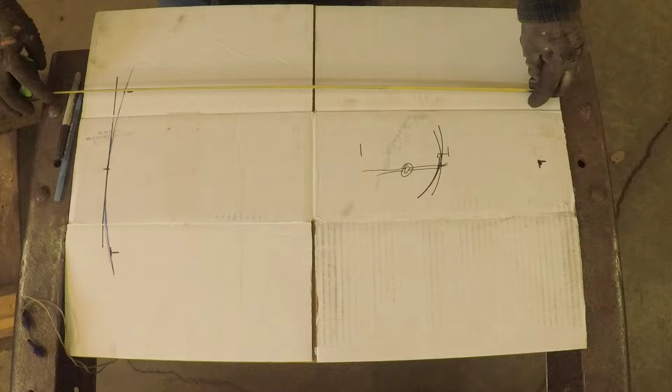for a 24-inch mark there, and a 24-inch mark, sorry, no, stayed here. Need to start over, I screwed up.

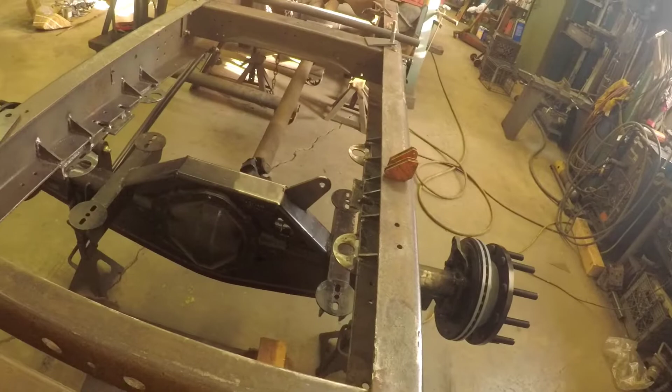Hey guys, so in the garage today trying to finish up this mess. Still got several things to tidy up on the airbag mounts, just some finish welding, but for the most part it's pretty well done.

Airbag mount, bump stop, and the next thing, you see I've got one bracket mounted right here. The next thing is we've got 4 links, but we do not have a panhard bar. So let me show you what we have to work with.

So I've got a few pieces laid out on the truck here, and I'll show you what I got. I got this with the 4-link kit. I ordered this along with the kit because I knew I would need one, and they have a nice one that comes with it.

It's from Infamous Metals, and they sent me 2 of these brackets that I'm going to mount to the frame, and this is your panhard bar here, and it's got your opening for your bushing, and then the other end of it is just hollow. They sent it like this because you have to cut it for your own setup. They really can't tell any of that ahead of time, and you really don't know what to measure until you start getting your axle underneath it.

And here's your bushing, and they send this right here with it, and I'm going to have to cut this for length. Your metal piece that goes in your bushing, your bolt rides in, so I'm going to have to cut that for length to fit in between my brackets.

And then the other end of it, they send this high angle heim joint with these nice fittings that go into it that create a certain space, and this makes the bar adjustable right here. They send you 2 of these, one of which is already tacked to the axle housing there, just for a moment to give me an idea to measure off of.

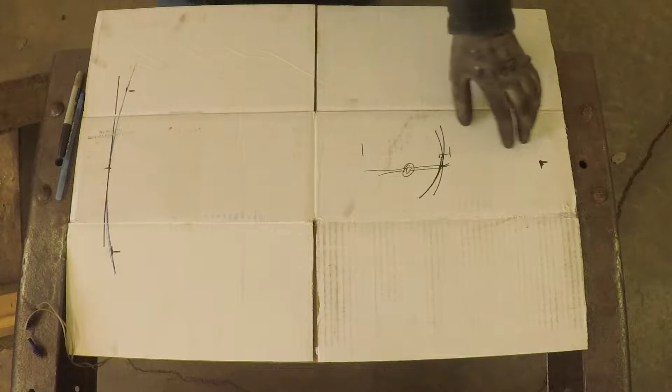But I made a mark over here on this end, so right there being the beginning of the tape measure, and I came over about 24 inches because measuring inside the truck frame, my track bar is going to end up being somewhere around 24 to 25 inches. Longer the better, so I went back with the shorter measurement of 24 inches and made me a mark over here, and that cross right there is the center point.

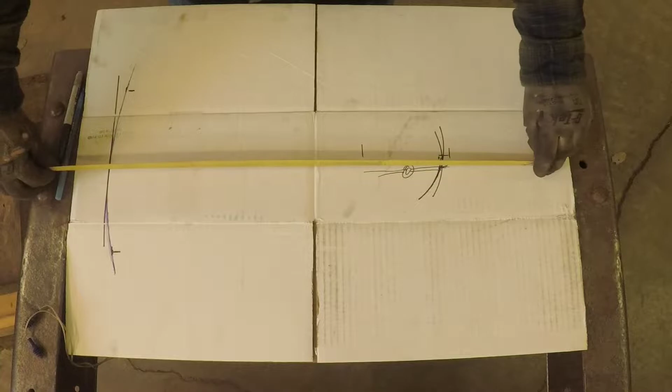And then I rotate from my center point over here to over here and made a 24-inch mark, and then done the same thing this way and made a 24-inch mark.

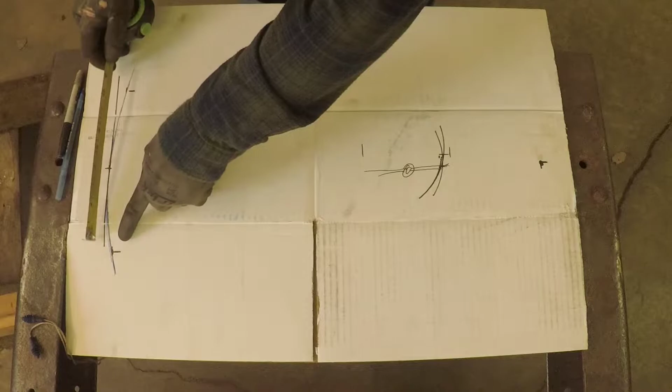So I know my travel is going to be about 9 inches of travel with the airbags. Full compression 3 inches, full travel 12 inches, so that gives me 9 inches. I go 4.5 inches from this mark to here, and 4.5 inches from this mark to here.

And so that gives me this range right here is the full travel of my airbags. Normally, they might stretch a bit under an articulation or something here. They can't really compress much more than this point, but this should be the travel area.

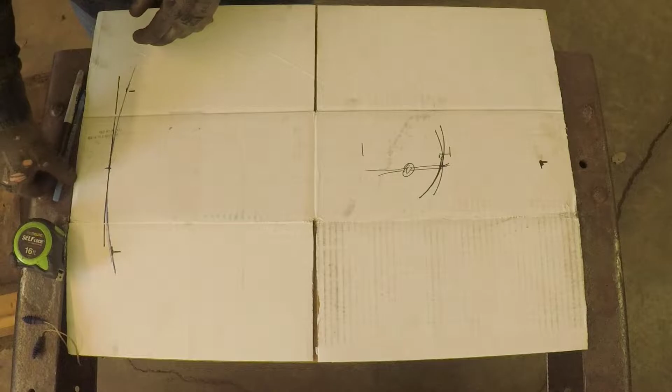So you can laugh at me if you want to on the next part here, but I'm looking around the garage for something to use to lay this out, and I found an old pair of earplugs.

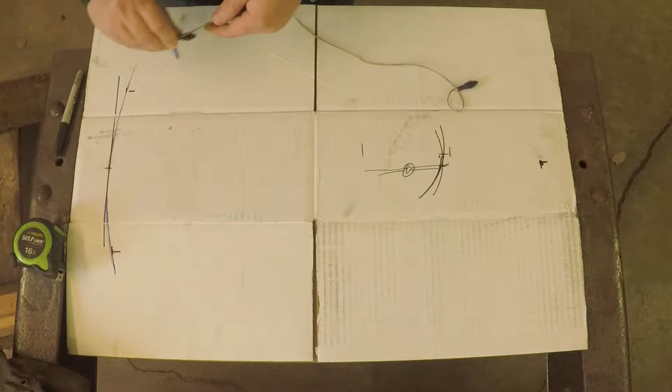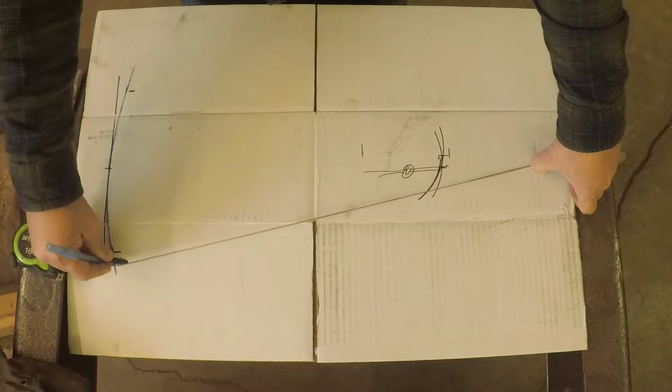And so now that I've got my marks, I'm going to take my ink pen and make a couple wraps around the base of it here. I'm going to set it here on my mark, come back over here on this other side, and use my fingernail to kind of hold it right where that X meets. I'm going to make sure my pen's straight up and down, and I'm going to do this to simulate the panhard bar over the length of travel and make sure it lines up where my marks are.

So the next portion is over here, where you go from a straight line off my measurement off this end, and it looks like I'm going to have about a half inch of full travel one way or the other on this axle. So when the axle is underneath the frame, it's going to shift as it goes full compression, shift 3/8 to this side, come back to center when the bar is level, and then as the bar goes down, it'll shift back 3/8 to this side, or a half inch to this side again, 3/8 to a half inch, something like that. So that gives me an idea of what kind of axle movement I'm going to have under the frame if set up at that length, and that should be a good movement for full travel.

Obviously you want it to stay center all the time. That's not exactly feasible unless I was maybe doing a triangulated 4-link. Maybe I should have gone that route, but for the type of suspension this truck's going to need for going down the road and stuff, this will be great.

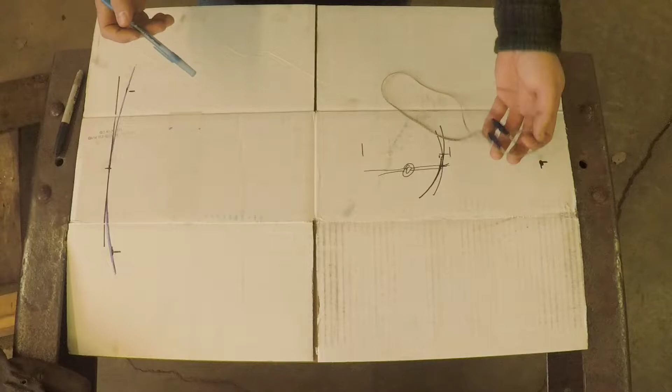And that is how I used an old pair of earplugs, an ink pen, a Sharpie, and a piece of cardboard to kind of lay out and make sure what kind of travel I was looking at.

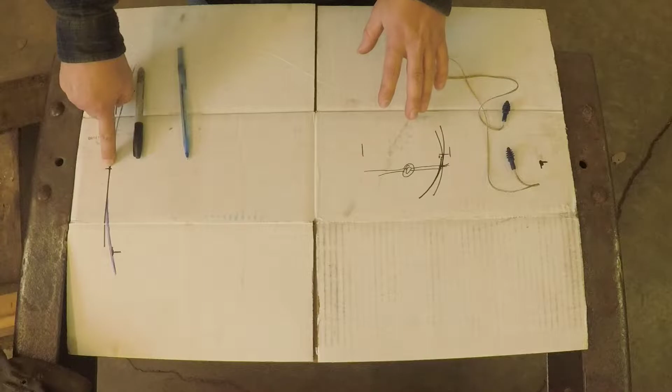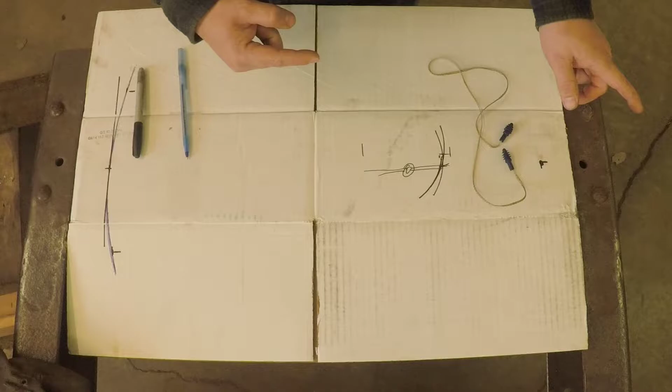Knowing that I'm looking at a half inch to 3/8 of travel, what I'm probably going to do is when I set this at the full level, I'm going to set the axle an 1/8 inch out the frame that way. That way, when it does travel that full range of motion, it goes an 1/8 inch out the frame that side, and 3/8 to 1/4 out the frame that side, and that gives me a large window of acceptable center for ride height, because I don't know that I'll be riding directly right at level with the panhard bar.

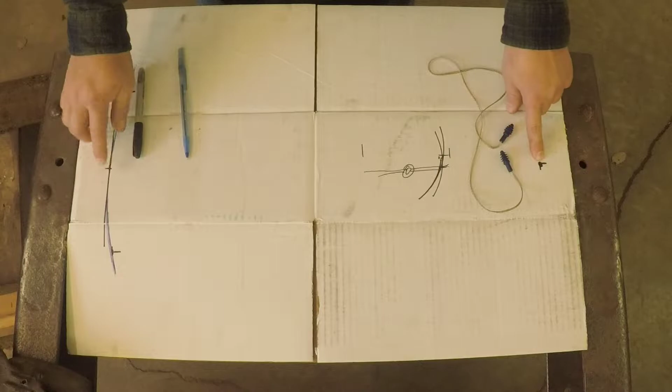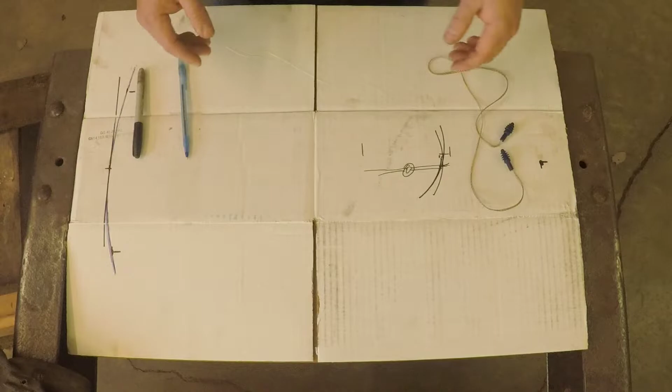And if it turns out that that is where I want to be, I can always, with the adjustable panhard bar, move it a good 1/8 inch to 1/4 one way or the other to put it where I like it. And if my ride height, I feel like it needs to be exactly center, I can. But that's why I have an adjustable panhard bar, because I've never done this before and this is a full learning experience. So this is how I laid it out, and now I'll go on to mounting my brackets and laying it out on the frame and cutting for length.

Let's talk about custom parts here for a second. So you're going to buy a kit and it's going to come with exactly everything you need. All you got to do is weld your tab on here or bolt this on here, and everything's going to go exactly how it should be. If you've got out of the box type stuff, like a lot of parts for my Jeep Cherokee, you can buy all kinds of stuff for it, but sometimes they need to be modified a little bit, and it goes no different than anything you go to do. So I'll show you what I'm talking about here.

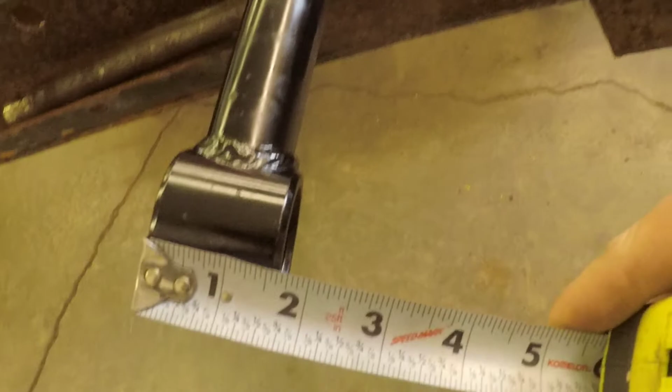So this right here is my end for my panhard bar, and let me grab a tape measure here. I had one on my hip a second ago, and there we go. So it is looking at 1 5/8 inches wide there.

So over here on the vise, I've got one of my bushings. It comes with 2 bushings, and it comes with a sleeve and a bolt with the brackets that I showed you. The sleeves, everything fits in the bar like it should. The bushings here, but the problem is you still have got tape on this one.

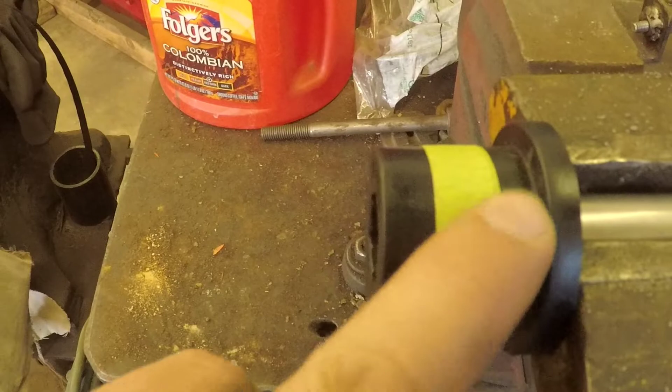I've already cut this one down to length, and I've actually cut them a bit long, because if you look at it measurement wise, that is about 1 3/8 inches to that shoulder. So being 1 3/8 inches, 1 3/8 inches, that's 2 6/8, that's 3/4. So 2 3/4 inches. Well, my bar end's only 1 5/8 inches wide.

So if I want to use both these bushings, I don't want the bar to move back and forth to the bushings. I want the shoulder to stop it. So in order to do this, I need to cut both of these bushings down some to where they press in on each side of that bar, and this shoulder right here is actually making contact with the outside of the bar end.

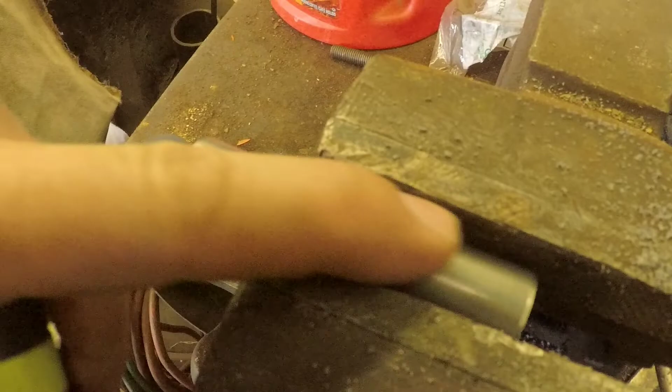The next thing is I'm actually gonna have to cut this pin. This is your sleeve that I've got clamped into the vise with. This sleeve goes inside your bushings, and this right here is also too long, and this will have to be cut down, and I have to get a shorter bolt for that setup. I'll show you more about why that's that way here in a little bit.

Just note that sometimes you have to cut and custom your pieces to get what you need. They probably could have done some of this there at their shop, but they'd have had to charge for their time, and the kit may not cost as much. And if you're doing all this anyways, you don't mind custom fitting a few pieces, at least I don't.

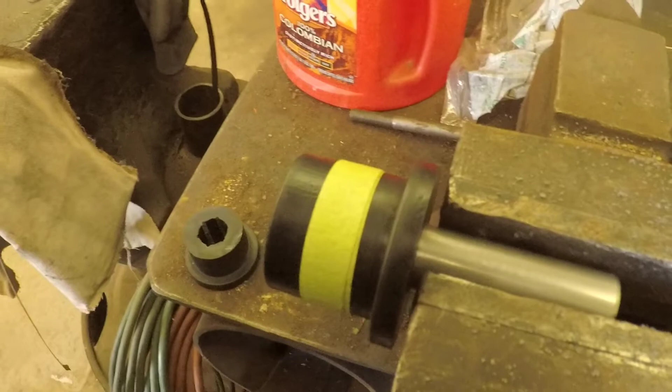Buying a custom kit doesn't fully mean everything's going to go on like it should. You gotta take measurements and pay attention to what you're working with.

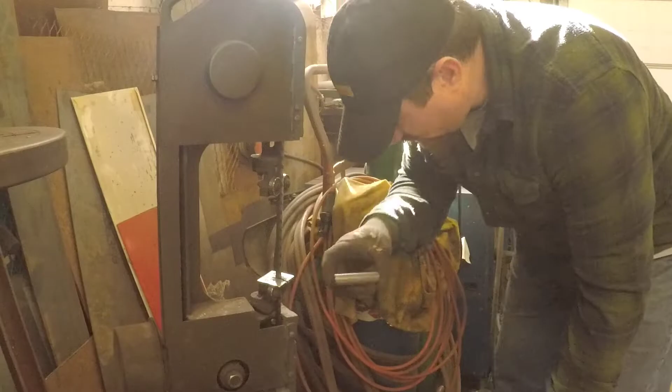I've got my pin here, and I've got it marked at 2 1/8 -- well, actually it's a little bit more than 2 1/8. I'm gonna cut a little bit longer, and then I can slowly trim it if I need to, which I probably will need to trim it like a 1/16, but we'll see. Plus, if for some reason I don't cut it exactly flush, it gives me a little bit extra meat to kind of clean it up with a flapper wheel or something.

And this is our bandsaw -- you can buy one of these at Harbor Freight or something. We lay it down and it drops on its own, spring tension in order to cut. We use it like this a lot.

Okay, now I've got a little burr there, and I'll take that off and kind of clean this up all the way around. But now I've got it cut to length. Manufacturer's probably going to tell you not to use it this way, but we don't have a stand-up bandsaw, so this one works.

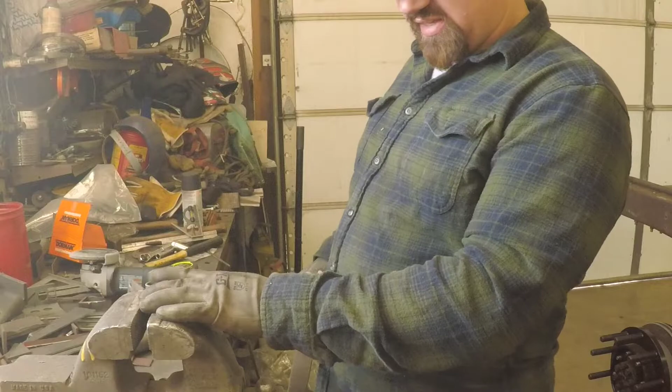So I've got it deburred some, and it's not exactly level. I can kind of take a flapper wheel to it and eyeball it. But what I'm going to do is I've got it in the vise here, pretty well level. If I really want to be super picky about it, I can kind of tap it a little bit. Lay my rule up there -- yep, now we are level.

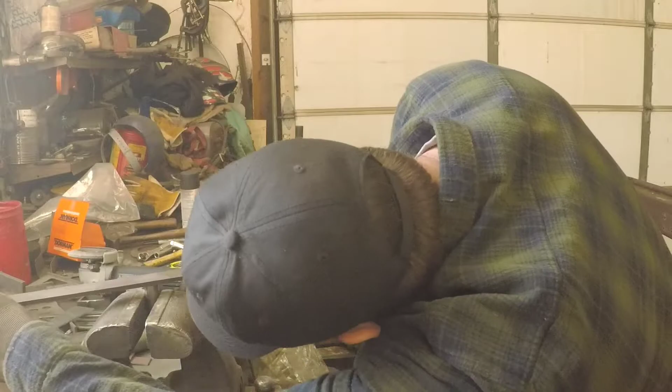So I'll give it a little extra there, just to make sure. I've got a great big flat file here, and I'm gonna put it on there about as level as I can, and level it just a little bit at a time. I've only got one of these, and I can't mess up at this point. If I do, I'm done for the day until I get another one. So I'm going to try and take care of the bump -- I'll go to that side and kind of work it some.

But get that filed where it is nice and square. I'm pretty close. And then you can kind of see where the file is cutting on it. You can tell where it's shining, where it hasn't been hit yet. So I know about how far I need to go down. Kind of get it all where it's flush. And then once I'm there, and I'm pretty close right now, I'm gonna call that good.

I'm gonna go around the edge here, just add a chamfer. It doesn't take a lot, I'm just trying to knock the burrs off of it, all I'm trying to do, if there is any. Like that. So now that pin should be the right length to go through my 2 bushings, and then we can get a bolt and mock this up.

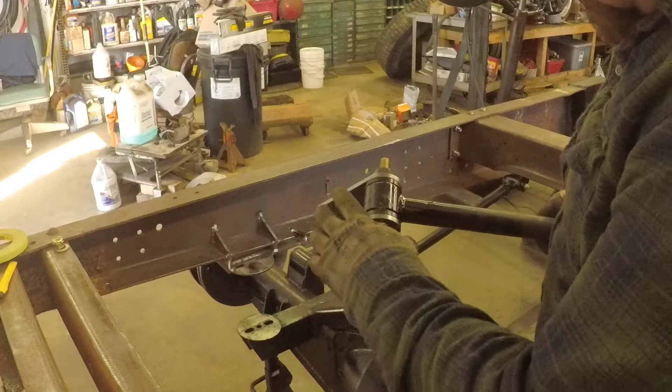Okay, so what I've done here is I did have to put that little metal sleeve back in the vise, level it back up, take a little bit more off of it to get this good and tight. And I can still see a slight bit of daylight in this one here, but I think that's good. I don't know, I might decide to shorten it just a little bit more, but we'll see.

Because of the bolt, we had a shorter bolt and shorter shank, and I want the shank to ride inside of these mounts here and throughout the sleeve, and we couldn't find one that was just right, so I used the one that was sent with it, and I've put 2 washers on this side and a washer on this side. And note that this is not the nylon lock nut that came with it, because I'm threading this on and off by hand right now, getting it mocked up. When I go to install it, I will install the correct nut and tighten it down.

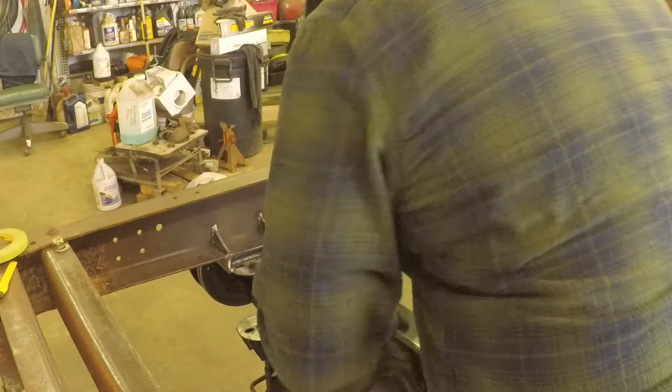So there are a couple things we need to do here. This is just kind of initial mock-up. I'm gonna set it right like that. So one is this obviously has to be shorter to fit in the frame. And the next thing is, let me come around on this side. I really would like for this to be as far back in the frame as I can without this bar interfering with anything in here. Because, you know, the longer the rod, the better for travel.

And I want to run this bottom side of these brackets on this flat like these are, and obviously it's leaving me a gap here, so I'm going to have to manipulate these brackets some. So my first measurement is that it's sticking off the frame about 4.5 inches, and I'd like for it to come back to here, put the center of my bolt at 2.5 inches right here. And I think that will give me plenty of play without interfering with this as far as down, and that gets me closer to the inside of the frame here.

So what I'm going to do is cut about 2 inches off the back of this bracket from this bolt hole. But the next thing is I'm going to run this as my square edge right here. And so when I do that, I'll make a line up and I'll cut that straight up and knock the corner off, so that will land against the side of this wall here. So when I weld, I can weld it on bottom and sides just like I did these triangular braces here. And that'll be a good solid connection to the frame that way.

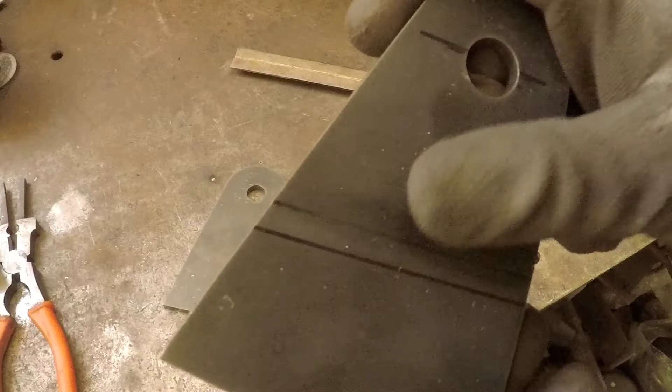So this right here is our bracket that I had on each side of the bar, laid up against the frame there. And if you look, you see this kind of rubbed out line here. That's called a mistake. So I kind of got the center of my hole figured out at that angle it was sitting at to make a right angle. And I had this up against the back of the frame roughly here. And I knew we wanted to move it back 2 inches.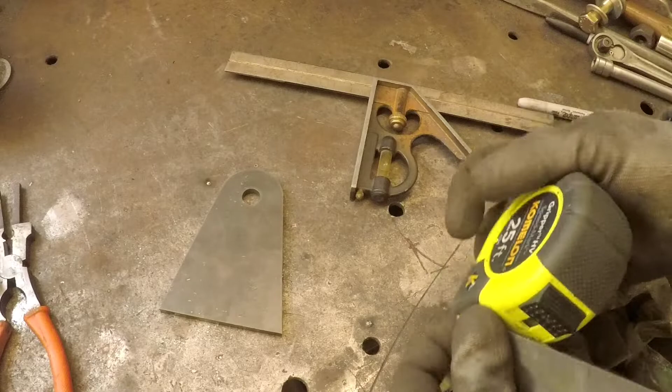So I took and made a measurement from the back of the bracket. Let me get my tape measure here. Made that measurement from the back of the bracket to get me to my 2 inch mark. And then, because I know we want to make this our square bottom, I took a square here and went off of that edge and drew me a line up through at that mark.

And because that frame slightly curves, it curves a little bit on the inside, it's not exactly a straight corner, when I cut this I'll round this corner a little bit so it'll set in there as a pocket. And then I'll take this other one and I'll mark it the same. That way they'll match. And then I'll get the other one cut and we'll get the rest of the bar cut off past that 2 inch mark, and we'll go from there.

So as usual, when I'm doing this stuff, things change. And what I've done here is, let me grab this out of the saw. I cut a little bit more of my track bar off. I call it track bar, panhard bar, whatever you want to call it. Let me get my protractor. We'll set this in place here so you guys can see it.

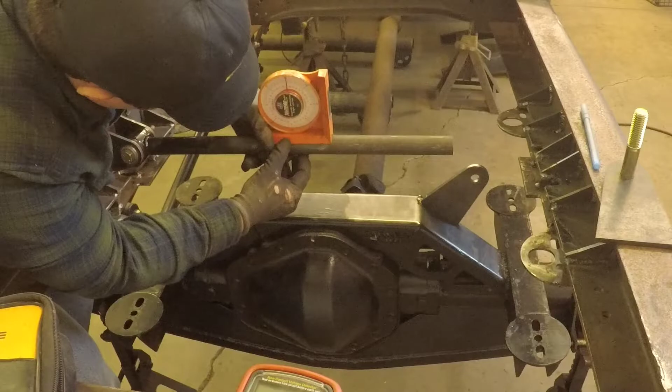I made my 2 brackets, and if I'm going for level, we're actually at mid travel right now, so there would be level. I'm still very much above that mounting point. I just tacked this on here the other day, just to give me an idea. And what I've decided to do is I had it out here where it was set pretty well level. I've cut this off, and I'm going to tack my piece in here, and I'm going to cut this off, and I'm actually going to build it up off of this to meet my bar.

And this will give me a lot of travel. The end is like 3 1/4 inches, so it'll come here. So it will clear my frame by about 1 3/4, 2 inches. And this would be the closest it would be to the frame in the swing. And I'm going to build this up off of this truss right here to where I can keep this bar as level as I can while this is at mid height.

So plans changed. I actually thought I was going to be able to mount it there, but unless I want to mount this lower below the frame, I can't keep this level at mid travel. So anyways, that's where we're at right now. I just want to give you guys an update as I'm kind of fiddling around here. And a lot of that stuff takes a lot of time, so I didn't want to put all that on video, but I don't know what I'm doing.

So I'm showing you guys as I kind of figure out what I'm going to do to prove to you that anybody can set one of these up if they do enough research and everything. And I'm sure there's some things I'm doing that are not right, but I think this is going to be functional in the end. It may not be to a pro standard, but I'm not paying to have a pro do it. I'm doing it myself. So we'll continue on here in a bit.

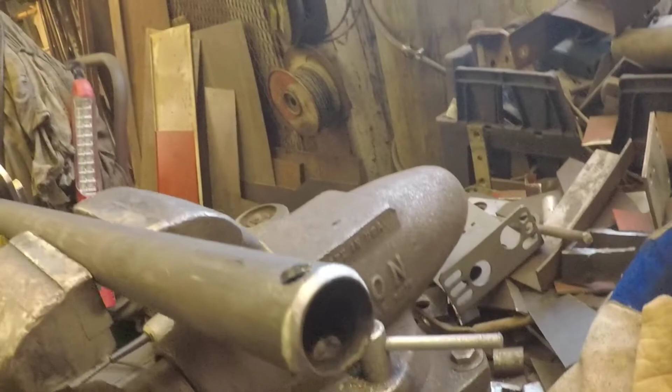All right, guys, let me show you where I'm at right now with this. So I took and cut the bar off, and I kind of chamfered around the edge with my angle grinder, the flapper wheel, where it's got a bevel to it.

And I also took and drilled 2 holes. That's going to be, you can call it a plug weld, people call it a rosette weld, because I'm going to weld in, I'm going to just bury hot metal into this until it's level, to make sure it's got a good bite along with welding all the way around this.

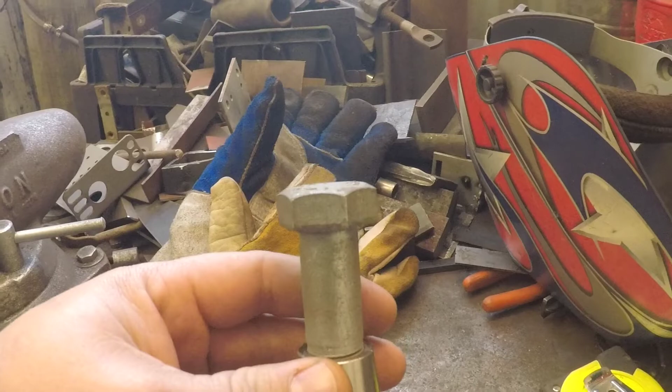And what I've also done is I put a fine thread bolt in there, longest threads I could find, to kind of keep it from messing my threads up while I'm welding.

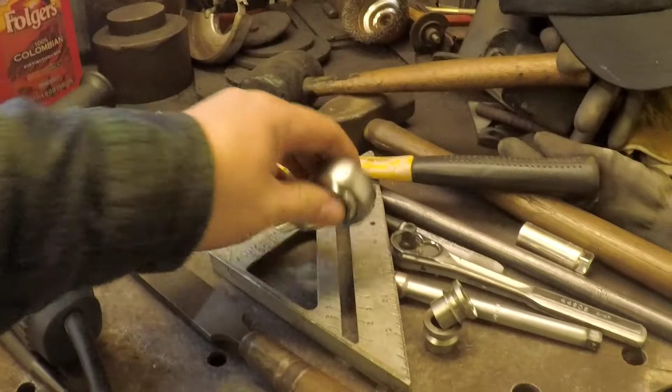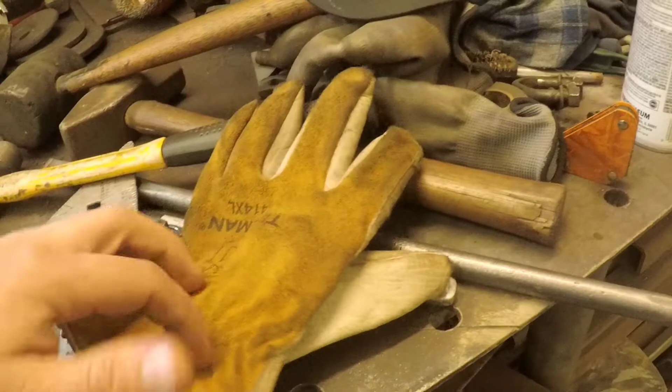The next thing is I don't want this to be in there while I'm welding, because that surface right there, that heim joint, I don't want weld splatter to end up on that, because it'll cause it not to be smooth. So I'm going to get it laid over here out of the way and probably cover it with a leather glove along with my other pieces there to keep that from happening.

So I'm going to go ahead and just put a couple tacks for now. I'm not going to burn everything in. I'm pretty sure this is where it's going to go, but until I'm 100% sure, I'm just going to tack it real heavy. I just want to show you how I had prepped it before ever putting that piece in.

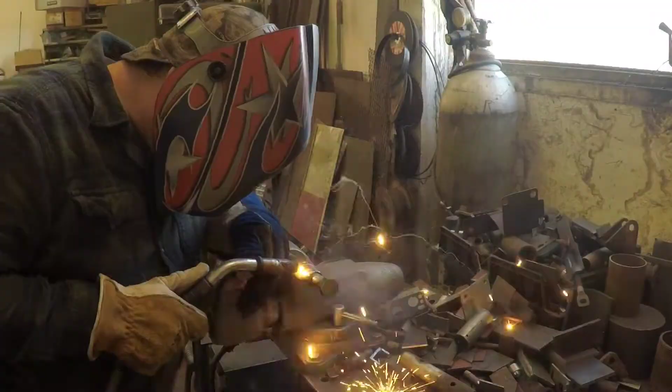Okay. That right there should be plenty good enough for now. And I will do this later on when I go back and fully weld this. I will use this bolt again, just to, like I said, keep the threads solid inside it once they get hot and don't let anything warp.

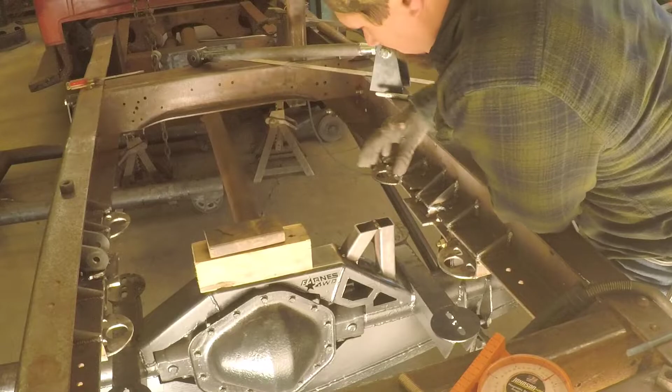Alright guys, so here's where we stand right now. So I've tacked a couple pieces in here, and I'm actually going to cover these with an 1/8" flat bar, or flat steel, once I weld everything in. And I'll show you here how my plans of that are going to go. So that's in. And once I get the flat steel on, this will be wide enough at the bottom to actually get this. So it'll be something like that.

And that will be my panhard bar mount. It's a little high off the axle, but it keeps my bar level, and it will be strong enough once I weld everything in that I don't have to worry about any issues. And of course, I'm gonna have 4.5 inches of up travel.

So let me lay this across the, so 4.5 inches of up travel, and that right there will put the panhard bar level with the top of the frame when it's fully compressed. And keep in mind, we're actually gonna put a bar on top of this and put a deck on this truck. So that'll make the clear range of movement.

This is the furthest out it will be, so as it goes up and down, it will actually draw in close. So my radius will go like this, about 1/2 inch total. And actually, probably not even that now that we are 25 inches almost. And when I did the drawing on the paper, I did it with a 24-inch link, and it was 3/8 to 1/2 inch. So we will definitely only be like 3/8 of movement for the entire axle. So I think that's pretty good.